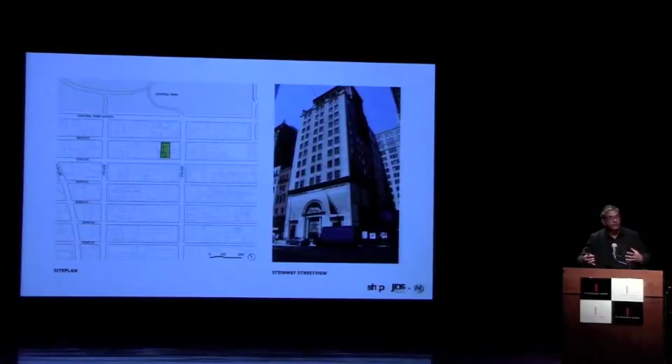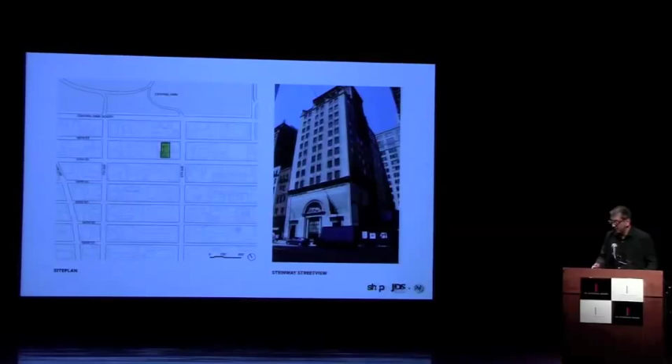We thought about that in relationship to the site of this building, directly adjacent to the Steinway Building, a great landmark, which immediately sets a tone for the fact that this building in some way grounds our work. It sits next to it, and we felt a very strong responsibility. This is Warren and Wetmore, the same architect that did Grand Central Station, and we felt this was a building we really needed to understand and respect.

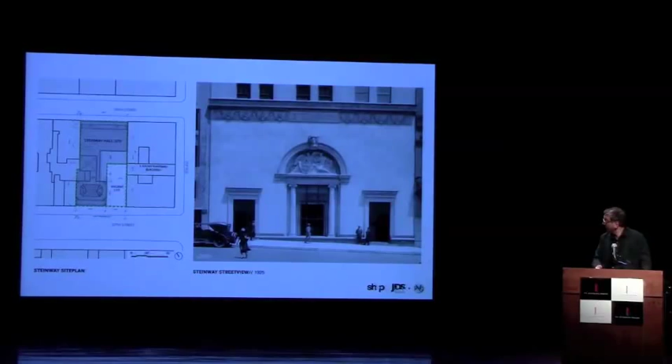It has a kind of L shape between 57th and 58th Street, with the vacant lot next to it, a very fine edifice at the sidewalk, and a very fine interior that JDS actually supported the landmarking of. This is a great rotunda. It has had world-famous pianists play here. Portraits of Billy Joel hang here. This is a very important place.

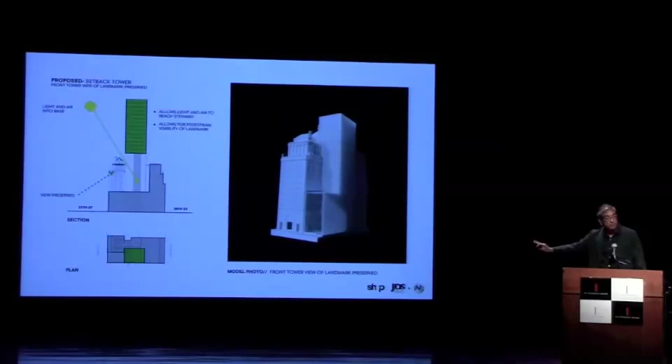One of our formative arguments to landmarks was to say, look, we think we should set this building back, and yes, that means we have to get landmarks approval, but we think it's fundamentally a better solution for all involved.

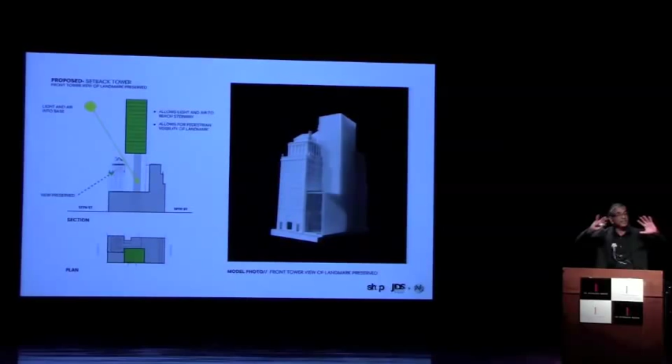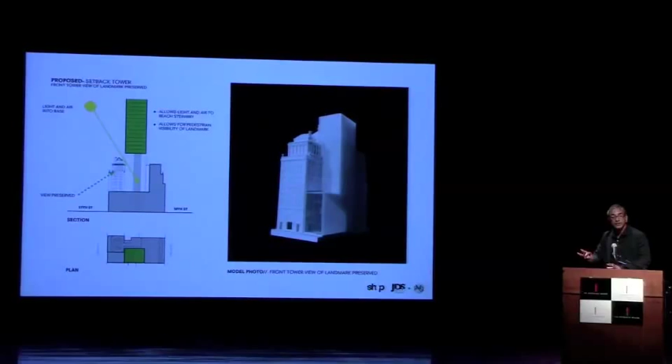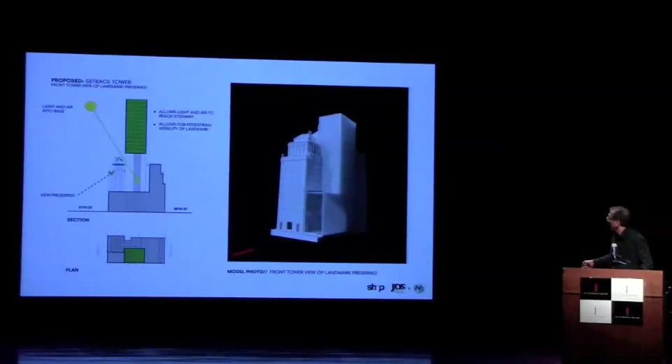It means that the building doesn't have its highest mass directly on 57th Street. There's a fairly significant setback, and what that allows is light and air to the Steinway Building, and an ability to understand that landmark in the round as a full landmark from 57th Street, with a fairly glassy but still material retail storefront adjacent to Steinway - I'm sure Gregg will describe that - but fairly low, trying to be deferential to its neighbor because of its great importance. This would also preserve the view, but also let light and air down into the base, and we thought this fundamentally presented a better solution.

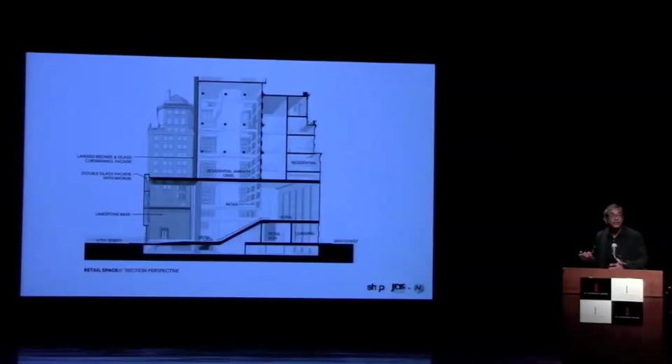We think this is going to be a very exciting space down on the ground. This isn't just about how the building meets the sky, but that one will come through retail, experiencing quite a large and expansive, very unique retail volume on 57th Street. Very importantly, we're restoring an enormous amount of the Steinway Building, including extending its limestone exterior, so again one feels the landmark in the round at the street level.

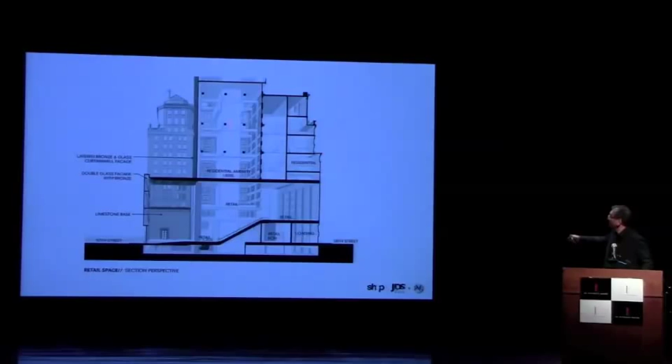And then retail, and then really residential above with residential amenities, and then the tower starting above that. So that gives you a sense, we're still working on it, of the ground plane. Again, it's trying to be a fairly quiet, demure neighbor where you can see the Steinway Building kind of wrap around. So we're filling in that facade, so you really get to experience that building, and then the retail in front of, next to it, and then the tower set back.

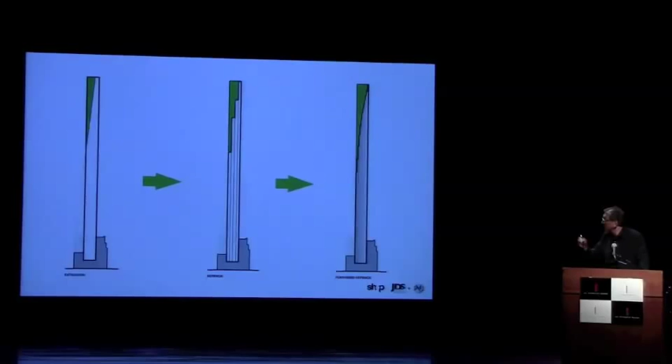So what's interesting is when the tower got set back in that argument I just walked through, all of a sudden we had more setbacks required from the zoning. We said, well, let's look at that and actually double down on that strategy, adding even more setbacks into this kind of feathered, laminated approach to the building. So it very gently tapers up into the skyline, and the facade will actually relate directly to those setbacks, creating some lyricism in the sky between the material quality and the facade.

That gives you a sense of those setbacks. It's a little hard to see here, but there are any number of setbacks on the 57th Street side, very different from the Central Park side. Basically, part of how this building is designed is that you have more glassy exteriors to the north and south because of those views, and more solid facades on the east and west, where the structural system rests and where a lot of the material expression of the building finds itself.

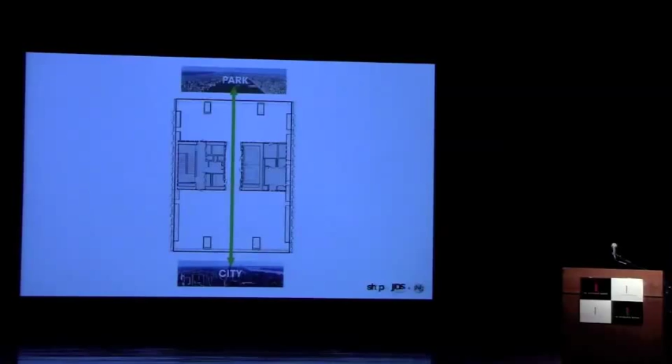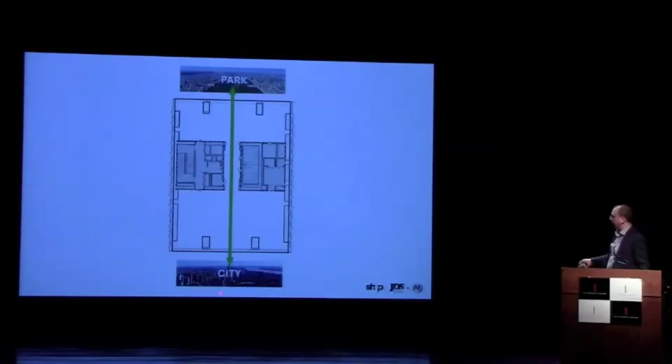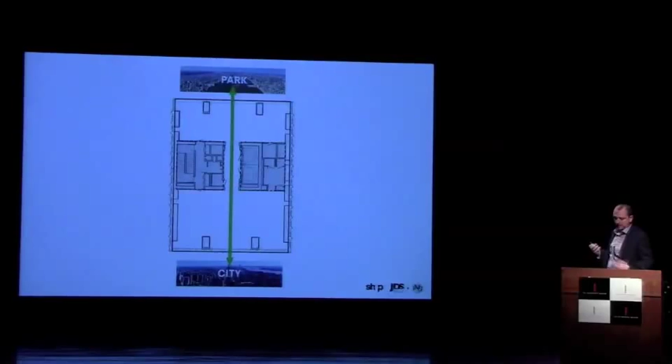As Vishaan just mentioned, we were really trying to capitalize on the park view. The building sits basically centered on the park, with the skyline view to the south, and we wanted to make it open between the two, so if you step off the elevator, you can literally see both. So you've got mostly glass on the north and south, and more solid, weightier facades on the east and west.

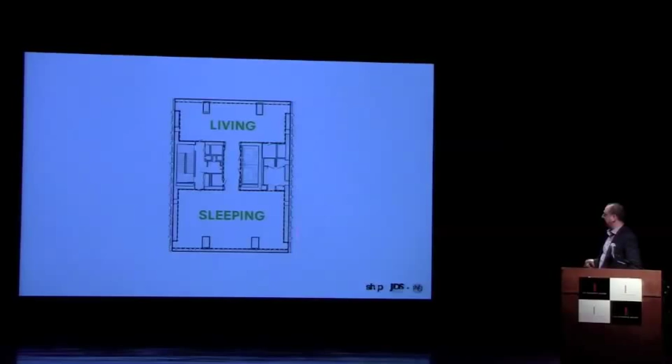There's this idea that there's a kind of living zone facing the park, 60 feet by 80 feet, and then a more private zone to the south. The floor-to-floor heights are 15 feet, so you'll have a 14-foot finished ceiling in the space — really quite remarkable, 14 feet high and 60 feet across facing the park. There are some duplex units which will even have higher ceilings.

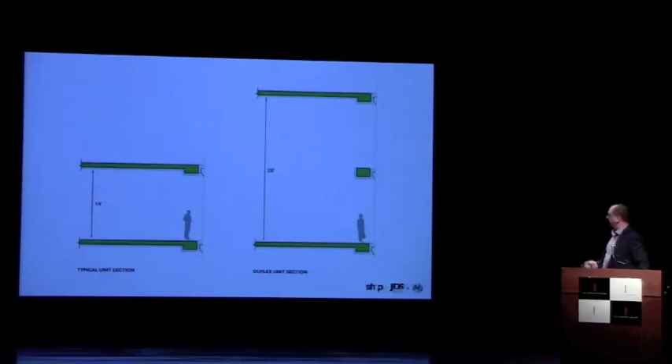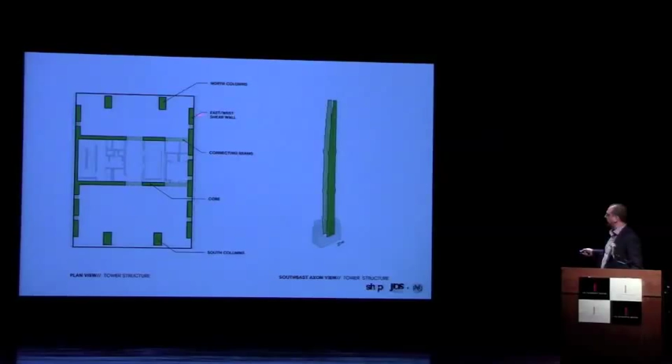And the typical tower plans, we are still working on these, but really the key thing is that the structural system — Silvian will talk about it — there are north and south columns here, but really a lot of the structure gets taken up in these two walls, with beams and the core connecting across to give the lateral bracing. So you have this kind of punched shear wall on the east and west. There are some windows this way, but really we're trying to open up the south and the north.

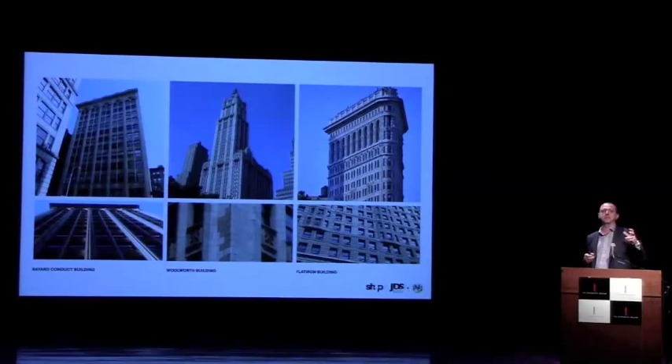We looked at buildings that became touchstones for us: the Bayard Condict building, Sullivan's only building in New York, the Woolworth building — where SHOP actually just moved our offices into last month, so we're really in a love affair with the Woolworth building right now — and the Flatiron building as well. We didn't want it to be this taut skin, the minimalist box. We wanted to think about what a 21st century, super contemporary ornament building would be.

The materials we started looking at were terracotta and bronze. We began thinking about all the things terracotta could do, how we could use technology to make different formworks, produce it, move it and twist it in new ways to give this play of light and shadow on the facade. Bronze is a really natural raw material that will patina. A lot of the firm's work is based in materials that are in their raw state and patina gracefully over time, along with a taut glass skin where appropriate.

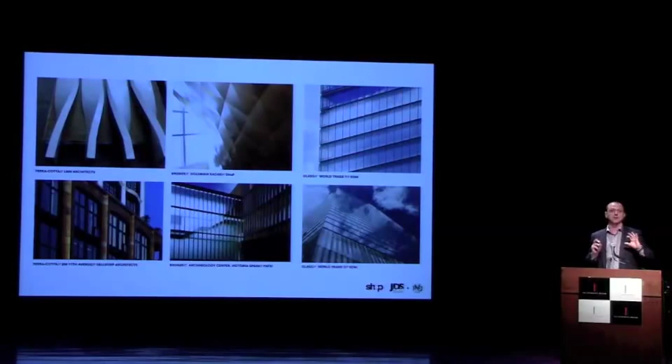One of our favorites is SOM's 7 World Trade. The idea was to really use the terracotta and bronze on the shear wall sides, and have the glass on the north and south.

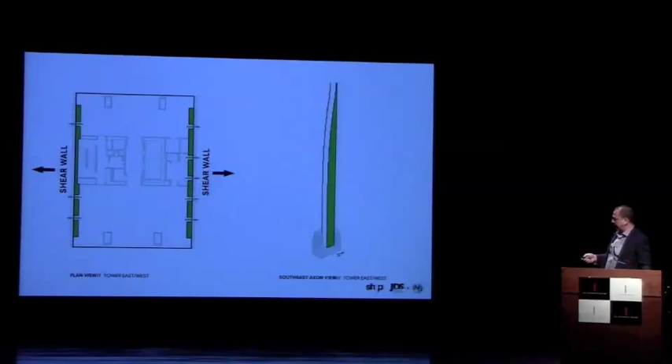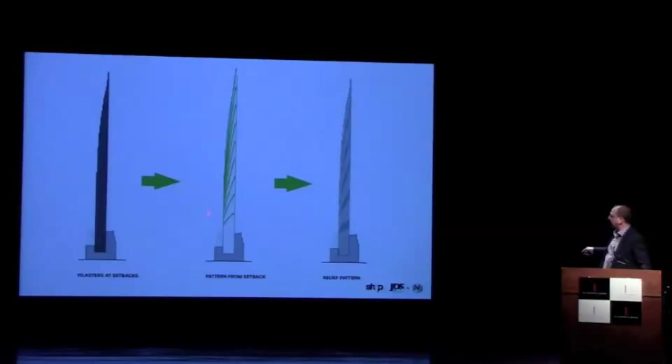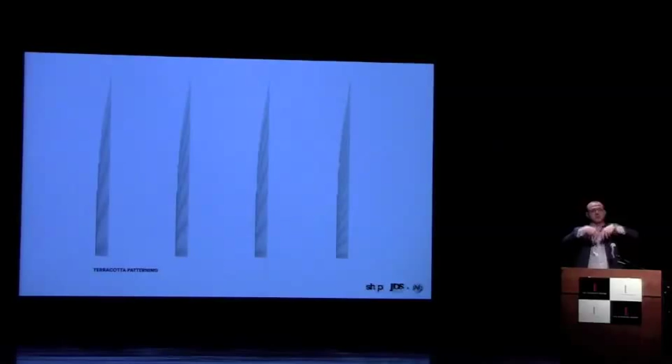Each band of terracotta actually terminates in the setback, so you can see how they move up. We took these radial patterns that come out of each setback and used them to twist the terracotta as it goes up the building, so that when the sun comes from the south, it casts shadows in the thickness of the terracotta itself, which is up to 14 inches thick, creating beautiful patterns that radiate off the setbacks.

Here you can begin to see each terracotta pilaster go up and terminate at the setbacks, and the shadows that get cast because the terracotta moves as it goes up vertically.

How many shapes are there, 21 or 22? I can't remember. Thirty. Oh, thirty, we upped it. Sorry Michael, that might cost more money.

So anyway, you see the different patterns—these are the different shapes of the terracotta when they're laid on top of each other. As each panel goes up, it begins to rotate to give you this play of light and shadow.

Between the terracotta is this kind of bronze filigree. It's almost as if the terracotta is pulling apart, and you have this lightweight bronze filigree that becomes a sinewy tissue between the massive, heavy, weighty terracotta.

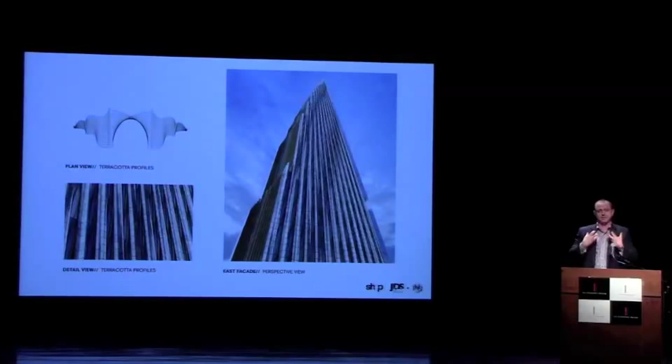These are just some of the patterns—we're still working on exactly what they'll be, trying hundreds of different types. This is the one we're really in love with right now, where you've got a bronze piece that caps the end of the terracotta and pulls across, with the windows sitting in between those pieces on the east and west.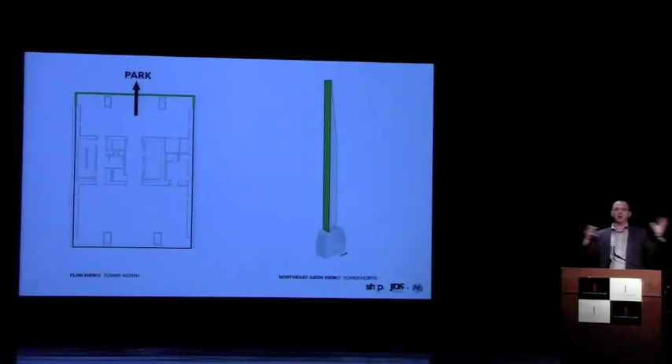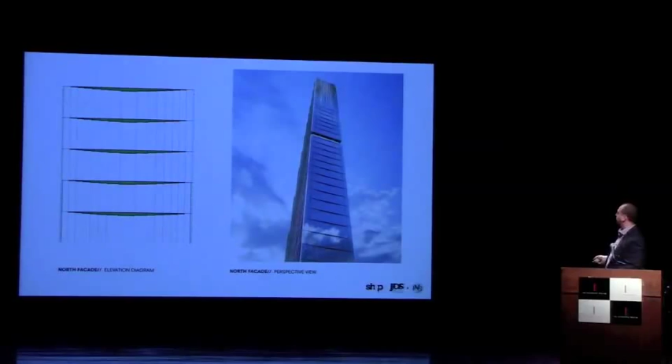On the park side, it's really about opening up the view to the park, so we went with a much more glass facade. But to avoid a just-taut skin, we have bronze reveals between each floor, at the beam line, so it's totally tight where it turns the corner to hit the terracotta, and as you get toward the center the reveals get deeper, then taper out again on each side—almost giving the feeling that the building is curved, even though it's a flat surface, with a nice shadow going across each one.

This is from the park, where you would see the bronze and terracotta on the side and the taut glass facade to the north.

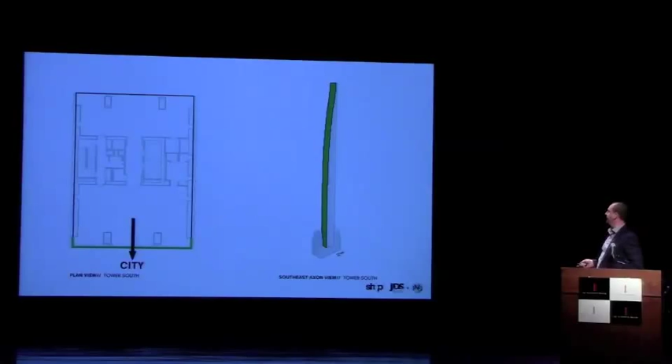On the city side, we took the bronze and did vertical fins, following the same pattern where it gets wider as you go toward the middle. These bronze elements sit out in front of the glass and accentuate the verticality when you're looking at it from 57th Street.

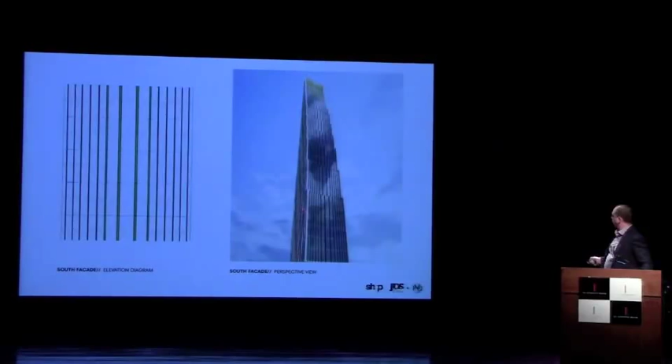And you can see as the building tapers all the way up to the top, this would be on the setback terraces. The terracotta, almost a finial, comes past as it terminates and breaks down. Here are your bronze fins as they come up past your setback terrace.

And then really at the top, we're working on the whole top of the building with a series of folded glass and bronze elements that really almost become like a piece of sculpture, so that when you're in the park looking back, the light will come through from the south and really illuminate that top as this kind of art piece, where the building sort of just dissipates as it comes up to the sky.

And I think that's where we are. And Silvian, were you going to speak?

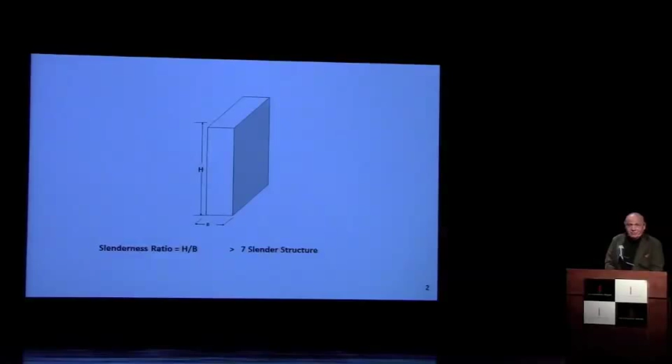But it's not applicable to people because we don't know exactly where to measure, but it's interesting to know. So what means a slender building? The code refers to slenderness only in terms of the strength. The codes in general are concerned with the safety of the people, what will be the strength of and the stresses in the various members of the structure. But beyond that, the code, it's irrelevant, like how the people will feel inside. That's not their business. As long as they are safe, that's the most important thing.

And that's our job. And we heard the architects talking about their dream. Soon you will hear the developer also. He has also a dream. And we are the ones to make this dream a reality, for the people that are going to use this slender building, to come and feel like home, not to be reminded every day or every 10 days or every month that we are in the slender building.

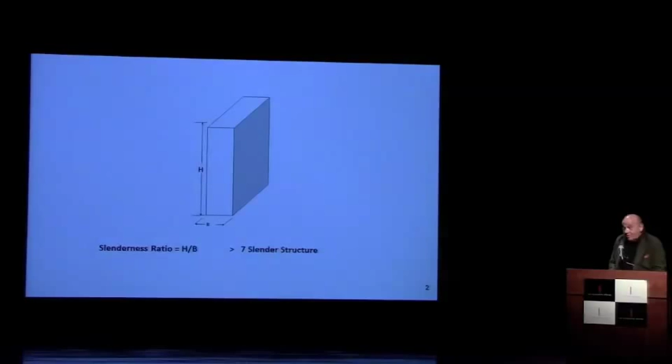What does it mean? It's the movement of the building. It's the lateral movement of the building. And that's a factor that is a very important one in the slender buildings. And in our area on the East Coast, the force that is acting and makes the building move laterally, it's the wind. So the wind blows against the building, and there are very many factors that influence the wind shape and the wind pressure.

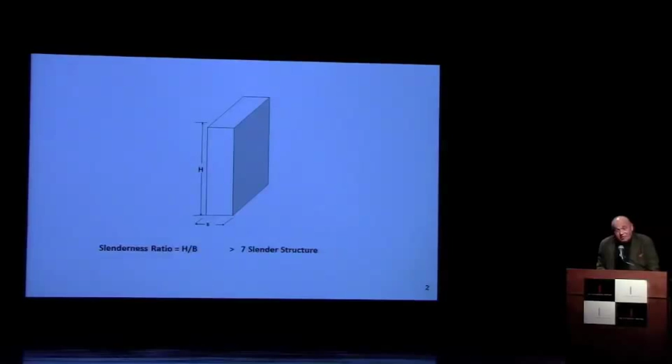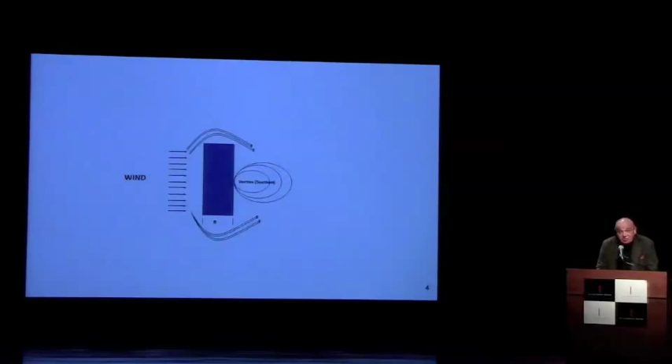So the structure itself has two items it has to stand against. One is the direct wind pressure, and the second one is the suction created by the same wind. Well, that's the reason we thought maybe to change the shape. What will be an ideal shape of the building in terms of the wind? And the very ideal shape will be a round building, because the wind flows around the circular shape, and the vortex beyond the building is very small, because there is nothing to oppose the wind. The wind is going through.

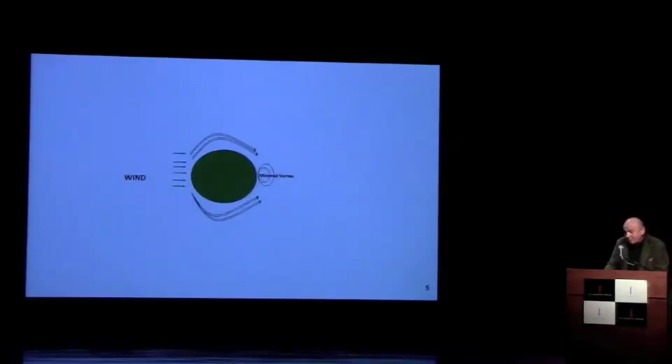So these are the enemies of the slender building, is the wind. In the West Coast, we have seismic movements, so they are a different nature. But even there, we check against the wind, and we'll talk about it in a second.

So what are the specific factors to consider? It's, as I said before, the dynamic movements. Dynamic movements, it's what we are calling the acceleration. And the acceleration, we are very concerned with because we want to create the comfort of the user, to feel in this very slender building as comfortable as in any other building, like a small building or a tall building that is not as slender as this one.

The second item we are concerned with in these very slender buildings, as Vishaan was showing very representatively, is that the floor area is very small. So now, in order to make the building strong enough, if we are going to fill it with columns and walls, there will not be room to place a bed or a table. So we have to be very concerned how we place the material to make the building strong, but to create the maximum space. And the last one is that the developer has to build something that he can afford.

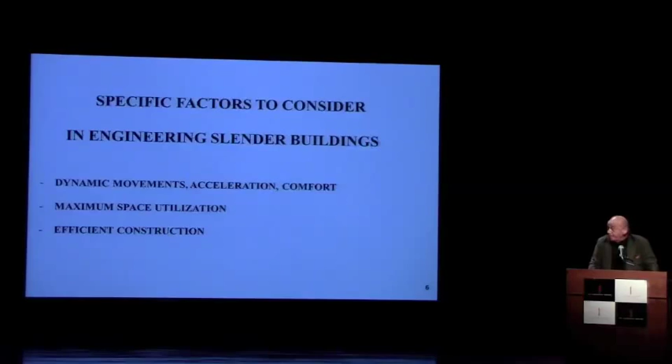Now, we mentioned the first one is the acceleration. Now, what is the acceleration? It's the change in velocity. Whenever there is a change in velocity, we have an acceleration. When we are in a car and we push the pedal, we feel something in the back pushing us. It's a force. The force is determined like the Newton formula, whoever remembers in physics, the force is equal to the mass times the acceleration.

In our case, we measure the acceleration in terms of the free fall acceleration, that is 32.2 feet per second squared, or 9.81 meters per second squared. That's the acceleration that we are measuring.

So to give you some examples, if you are in a plane that takes off, the acceleration is like half of the falling body, which we call g, the little g. So we call it half a g. If you are in a fighter jet, the g is 3 g's. Now what does it mean? The g times the weight of our body is the force that we are being pushed with.

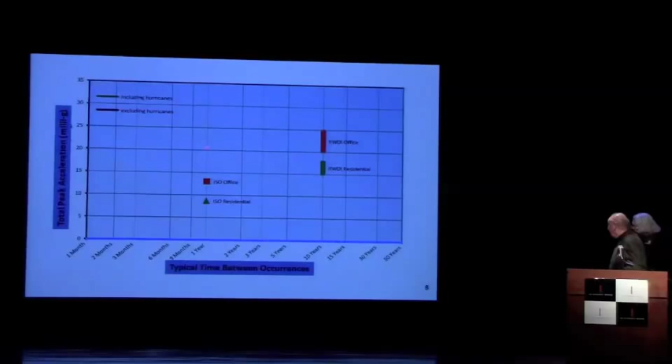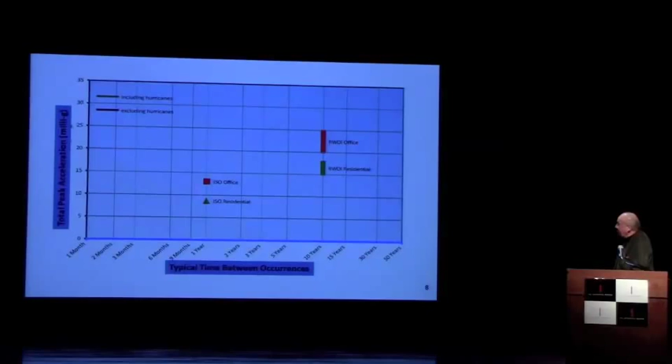How do we accomplish these limits of acceleration? By creating a building that has rigidity, that it's a strong building. Another factor that is very important is what is called generalized mass, in other words, the weight. You will see a comparison between the rigidity, the stiffness, and the generalized mass. Then the third way is natural damping, which we'll discuss, and also auxiliary damper systems of various types. And the last one is the porosity, or confusing the wind. This brings us back to the round shape I showed you, where the wind can flow freely, as opposed to a rectangular one.

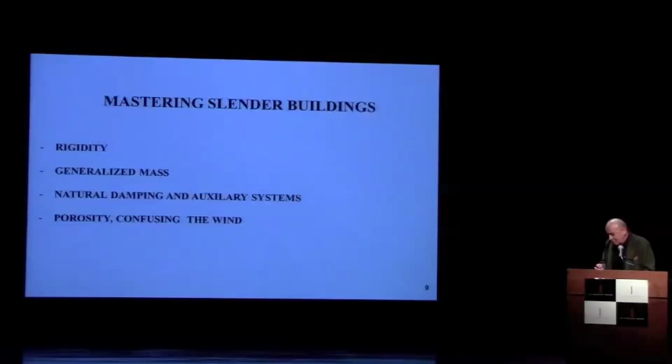Now, the rigidity: we measure it by what is called the period of the building. The building is like a pendulum, so the time it takes to do a full cycle we call the period. If the period is short, the building is very rigid. So when engineers talk among ourselves about how rigid a building is, you'll hear them say, 'oh, it's 5 seconds.' 5 seconds, very good. 8 seconds, not so good. However, if we get to the upper numbers, 11, 13 seconds, that's good again because it takes a longer time to do the cycle.

In this graph we can see a comparison between the rigidity and the weight, what we call the general mass, which is the weight of the building. It reminds me of a joke in college about a skinny, very tall guy - we used to joke that on a windy day he'd put stones in his pockets so he wouldn't fly away. So the mass is very important.

So here is point one: stiffness, or rigidity, or strength. And the other one is the general mass. These curves are the accelerations, so we can see here 43 milli-G, 41 milli-G, 30, whatever it is.

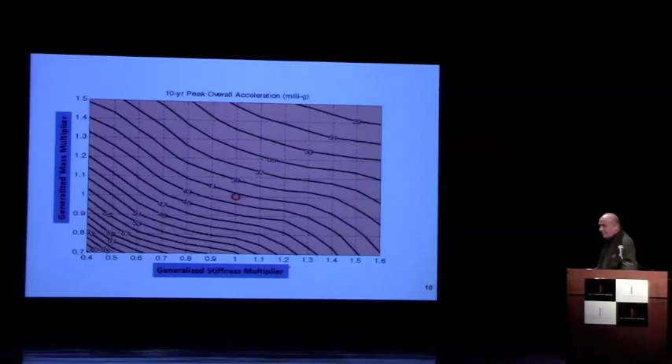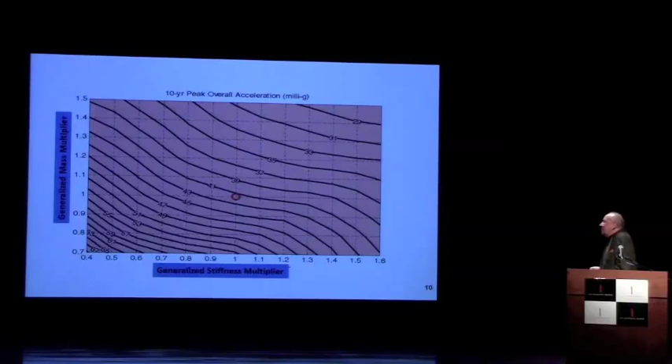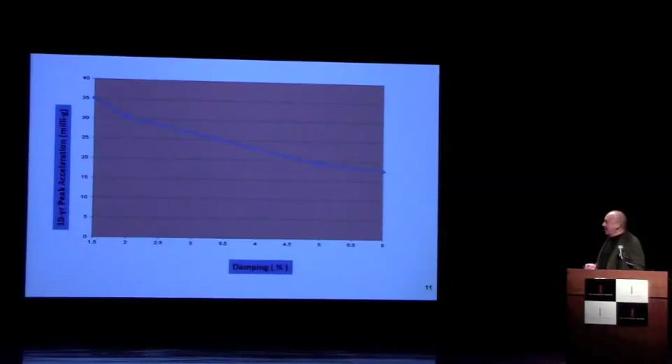Anyhow, just so you know, the general mass is very important - the weight of the building for its stability. The damper is something like a shock absorber for the building. The better the damper is, the smaller the acceleration of the building.

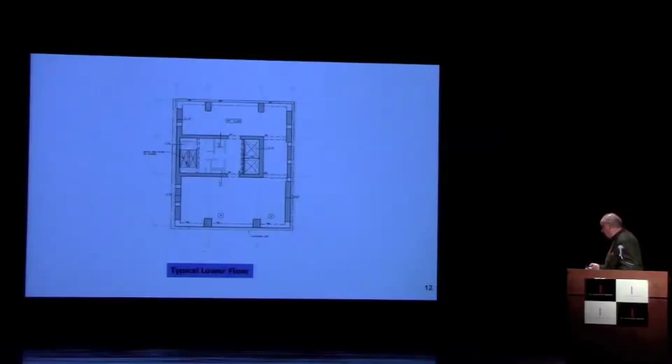We achieve damping naturally due to friction inside the concrete, but we also have auxiliary dampers. The last thing is that we make the building rigid by putting a lot of material in to minimize acceleration, but by the end of the day we have to create a usable floor plate. This is a lower floor where, as said before, we have a central core. The central core houses the elevator and stairs, and then we have two walls. But because the total footprint is very small, we have to engage the entire building to act together - otherwise the core itself cannot do the job. By the way, the core also has a benefit in terms of safety, allowing people to exit. These walls are about 2 feet thick, very solid walls, so nothing can happen to people who have to get out in an emergency.

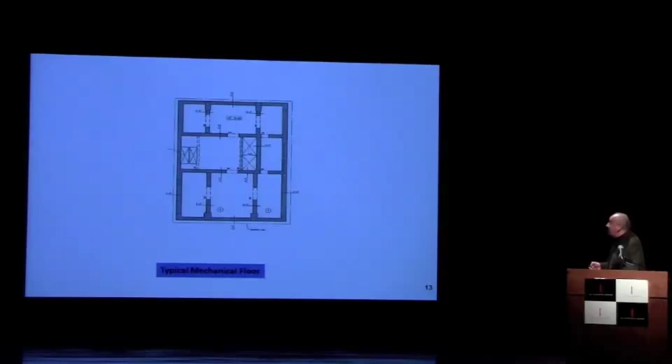The connection between the core and the outside of the building is done at the mechanical level, where we connect with walls - it's only machinery there, so nobody minds. And here is the upper floor; no people are affected inside because it's just mechanical space. You can see the simplicity of the structure - outside of the core walls and the two extreme ends, there are 4 columns, and that's the entire structure.

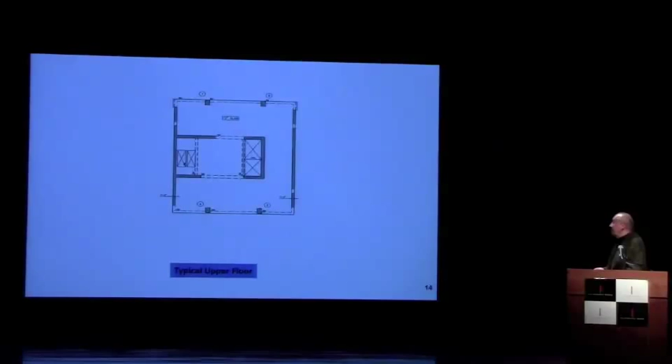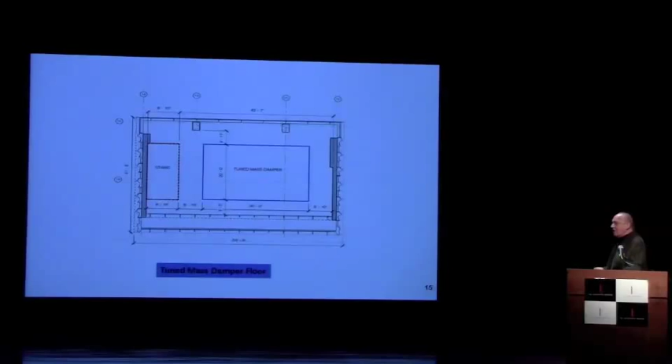Then we have the tuned mass damper - that's the damping, the shock absorber of the building. That's what brings us to the milli-G numbers we were talking about before. And here is the total - these are all the elements that take place in terms of the structure.

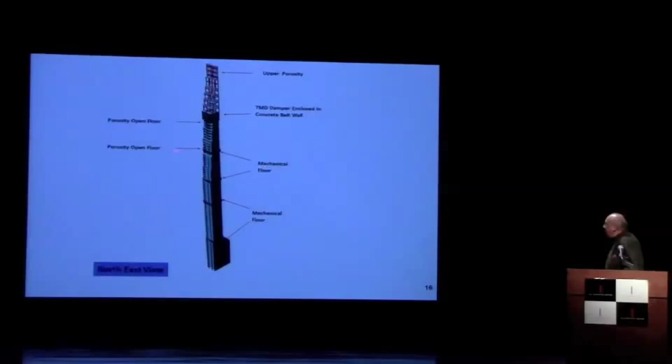We talked about the porosity - the fact that the wind has to flow through. The mechanical floors are there in any event, so we capitalize on that by connecting the core to the outside perimeter. In addition, we have two open floors where the wind flows out, similar to how we discussed with the circular shape and the flow of the wind. You can see them on the side - one open floor, another open floor. This is the porosity that we tested in wind tunnel studies to see how the building reacts, and we had very good results.

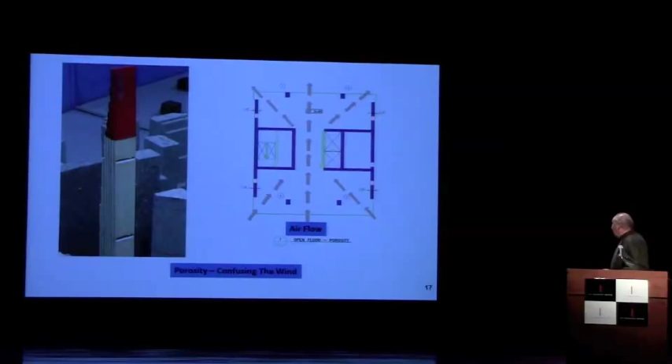That's a model in the wind tunnel that we performed on the building. And this is the tuned mass damper, a weight at the top of the building. We have one, the red one, about 850 tons, and the blue one, about 350 tons. They're suspended by all kinds of machinery. The red one is heavier because in the east-west direction the wind is stronger on the building, and the blue one is lighter for the north-south direction. So all this is being calibrated.

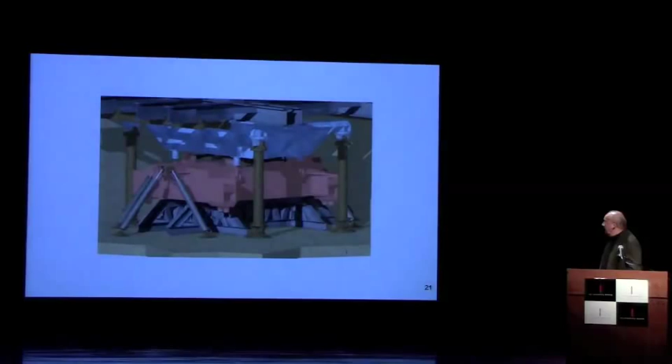Now, can we have a little video, two seconds, can you play it? Silvian, no, we have to stop because we have no time for the discussion with Michael. Okay.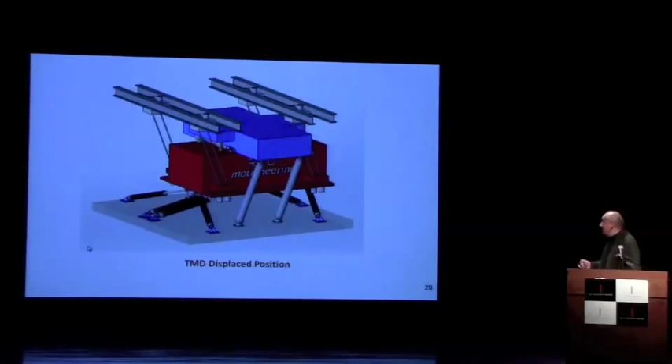So imagine that this was the movement. Just no video—this is the movement. And thank you very much.

Stay up here. Thank you. Always okay, the lights are going to come on, and we'll bring some chairs out.